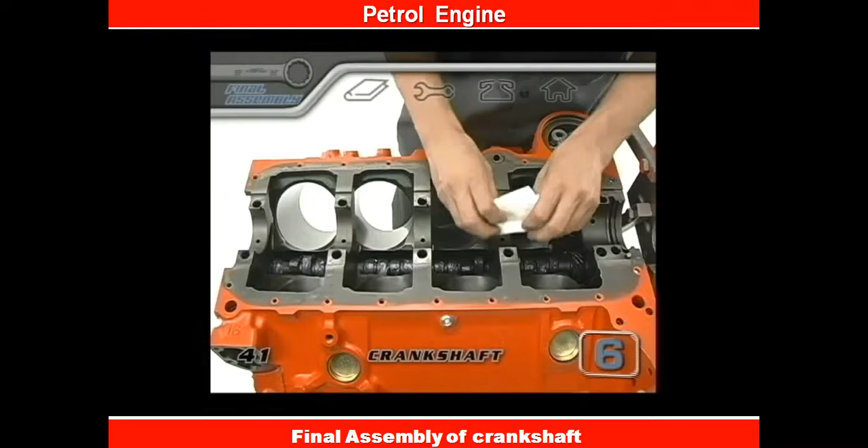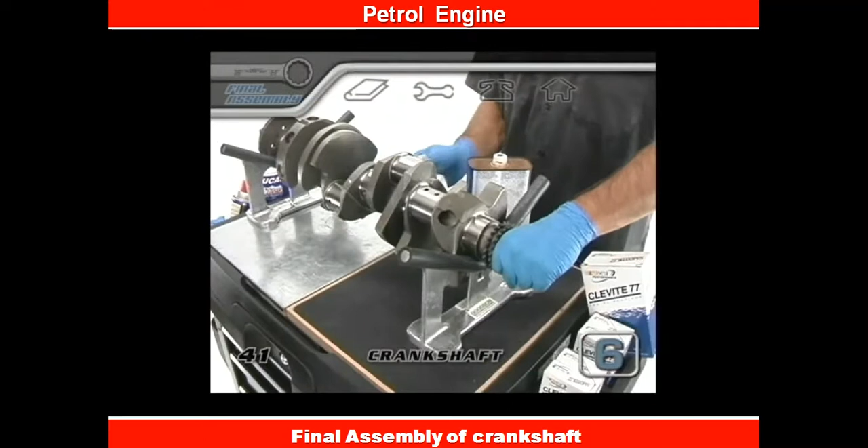Let's clean the saddles of the block. Do the same for both sides of all the bearings to make sure there's no dust or buildup from the previous lubricant. The crank itself should be cleaned off as well. Install the main bearings and double check that the oil holes are lining up with the ones in the block. While you're at it, you should clean the caps and wipe and install the bearings for them as well.

When the motor starts up for the first time and while it's running, the camshaft requires more lubrication than the crankshaft. Clevite's engine assembly lubricant is great for the cam journals and lobes, but it was specifically designed to provide the startup and break-in protection that even their highest quality bearings deserve. Don't forget to wipe some on the faces of the thrust bearing as well.

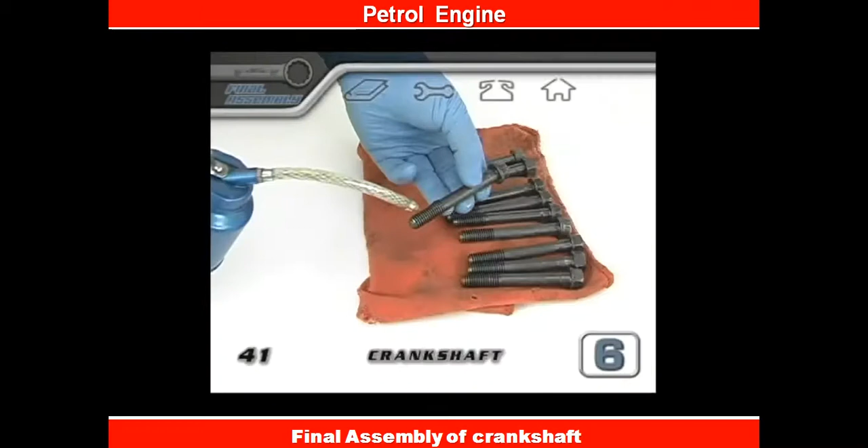Of course, be really gentle as you lay it into place, and when it's set, lubricate each of the caps and then place them. From here on out, every bolt that goes in the engine is going to need to have some kind of lubricant or sealer on the threads. The main cap bolts should have some engine oil on the threads to reach the proper torque setting.

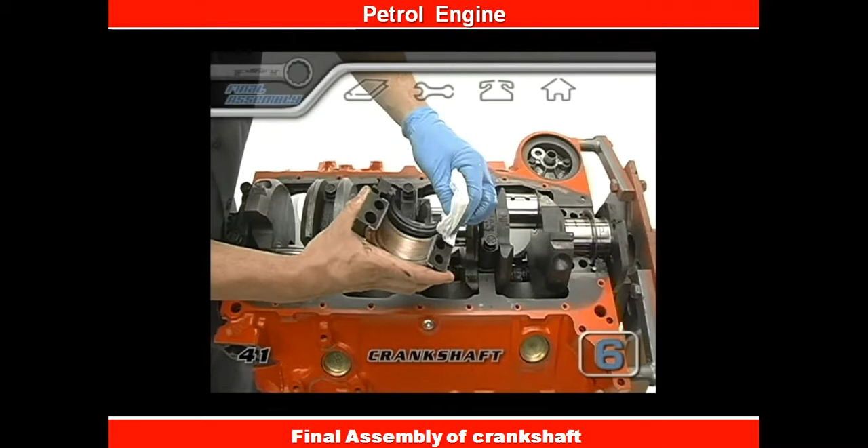For those of you with rubber rear main seals, remember to use the protector shim on the seal when you put it in the rear main cap as well. And of course, rubber or rope seals get a little bit of oil on the seal itself. The contact surface of the rear main cap needs to be clean in order to seal correctly against the silicone that's on the block.

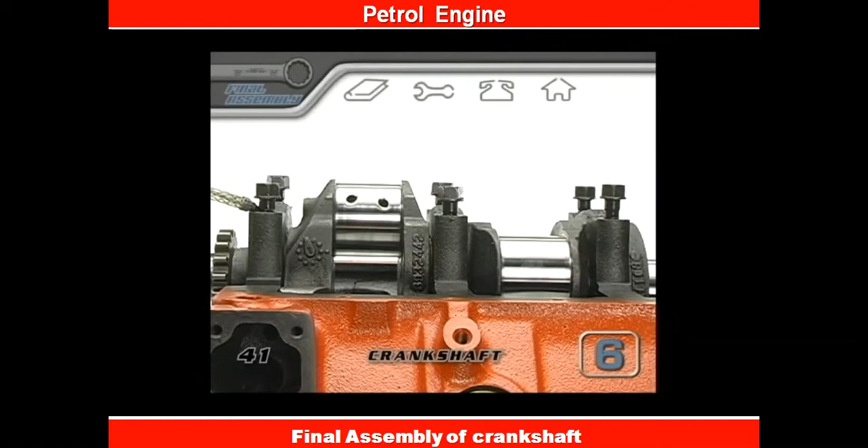Before the main cap bolts can get torqued, they should also have some oil put on the cap where the head of the bolt is going to contact the cap. If you already put some under the head of the bolt when you did the threads, then that'll be fine.

You're going to need to have all the torque specs for your engine handy from here on. Check the engine spec section at boxwrench.net for all the most popular engine specs. If we don't have a listing for your engine, you should be able to find what you need in a repair manual.

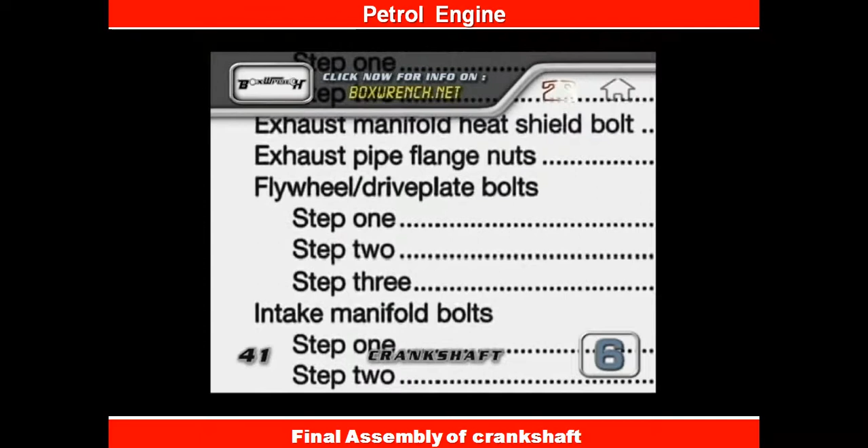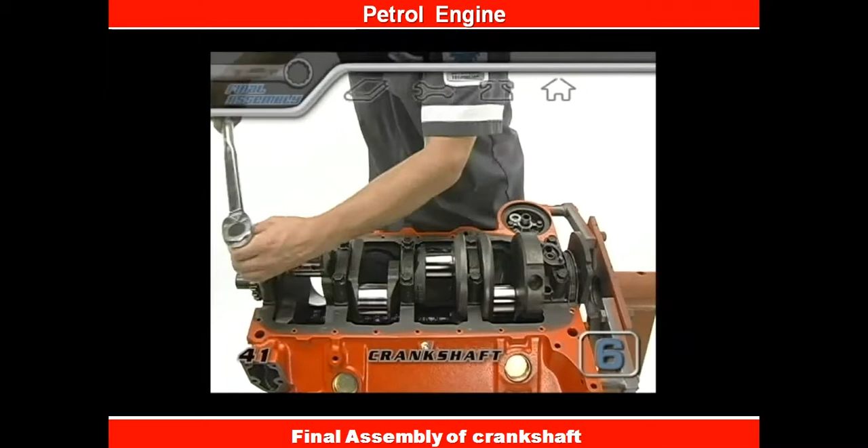For the final torquing on these main caps, we went in 3 increments, just like we did in pre-assembly. This engine needed 65 total, so first was 20, then 40, then finished it at 65. If you have 4 bolt mains, do the inner bolts first. Remember, don't torque whichever cap has the thrust bearing in it.

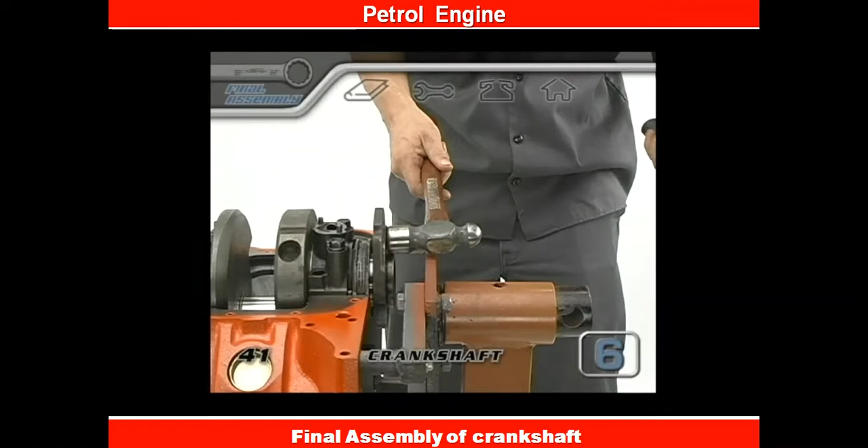When the other 4 are torqued, smack the back of the crank with a rubber mallet, or hammer against another hammer to seat the thrust bearings. Now you can go through the 3 increments to torque the cap with the thrust bearings. Now your crank is in for good.

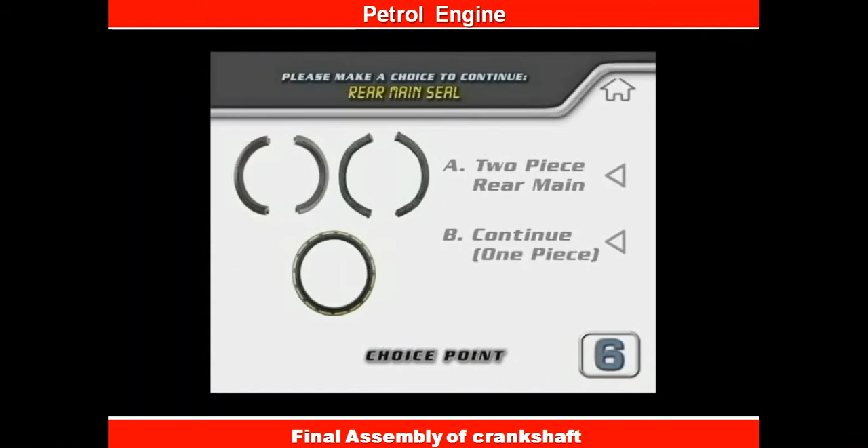If your motor has a one-piece rear main seal, you can click on the one-piece button for instructions. If you've already installed your 2-piece setup, click the Continue button to jump ahead. For those of you that have a 2-piece rear main seal made of either neoprene rubber or the older rope style, click the 2-piece button for your next procedure. For those of you that have crankshafts with a 1-piece rear main seal, we'll be dealing with those types of seals later. Click on the Continue button to skip ahead a bit.

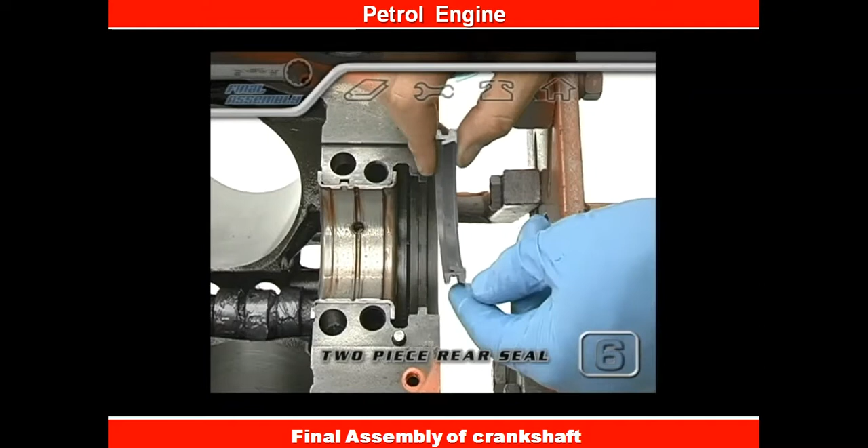Engines with a 2-piece rear seal need to have the upper half installed before the crankshaft can be lowered in place. For a neoprene rubber seal, the pointy lip will point towards the inside of the motor. When you press it in its place, use the plastic protector shim between the seal and the block to keep the rubber back of the seal from getting cut by the sharp edge of the block.

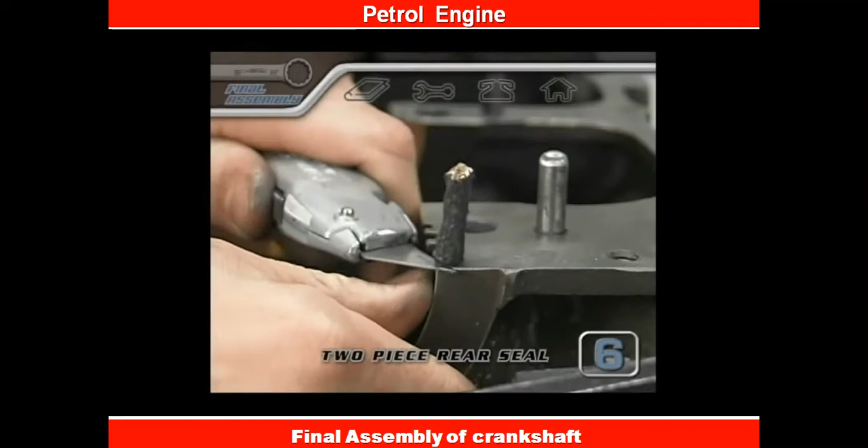For engines with a rope seal, you need to work the rope into the groove of the block and then use a large socket to tap it deeper into the groove. Then cut the excess flush with the block. Use a razor knife, but if finishing the cut gets tough, just clip it off with some cutting pliers. You can bolt the cap in upside down for some motors to install the rope seal in the rear cap.

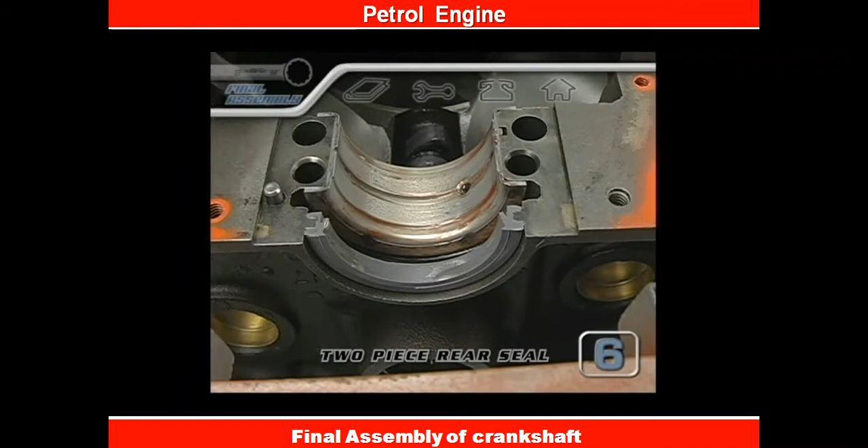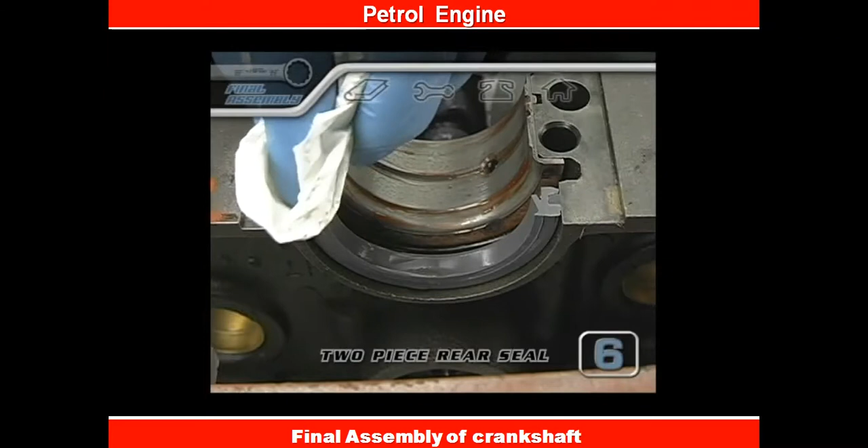In either case, put a little oil or assembly lube on the lip or the rope so the seal won't burn out on startup. For all types of engines, it's very important to put a dab of silicone sealer on each side of the seal where the rear cap meets the metal of the block. If you don't do this, oil is going to leak out of the rear of the block because there's no gasket here. You should also spread a little on the tips of the neoprene or rope seals as well.

For a 1-piece rear main seal, you'll need to have access to the rear of the block. This type of engine uses an adapter that bolts to the block. This way, the rear main seal is fitted in after the adapter is sealed up and bolted in place. You can remove the engine from the stand if you want and install the seal, but then you'd have to put the engine right back in the stand.

We're just going to wait till later to do our one-piece rear main seal so we can keep moving forward. We did seal and install the adapter because we were lucky enough to be able to get it past the engine stand adapter. If you're able to get your adapter on, great. If not, don't worry about it. We can deal with all this stuff later. Let's move on.